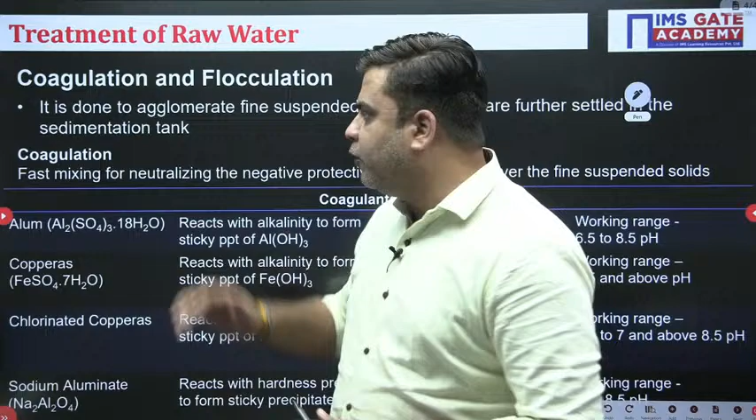So the first process is coagulation and flocculation. Coagulation is the fast mixing where the coagulant is induced, which neutralizes the negative protective charge present over the surface of the fine suspended solids so that they can come together. And flocculation is a process where the sticky precipitates revolve around the entire volume of the tank and over the surface of the sticky precipitate, all these fine suspended solids will attach to form a larger size of solid which can settle out easily.

So here are some of the things. Coagulation is fast mixing whereas flocculation is slow mixing. In order to carry out coagulation, we add some coagulants, namely alum, copperas, chlorinated copperas and sodium aluminate.

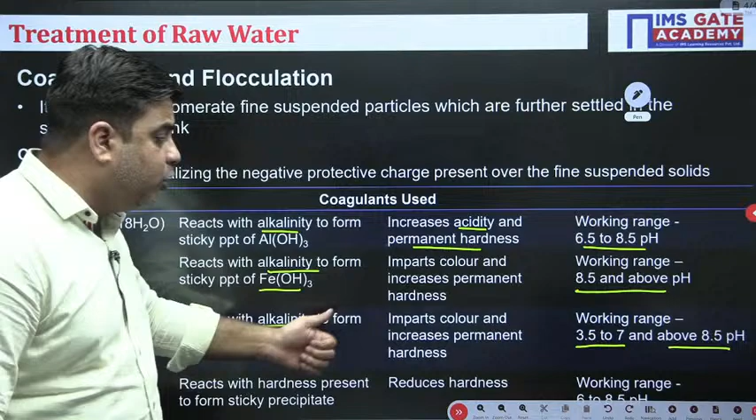My dear, here you can see there is a salt of aluminium and these two are salts of iron. Salt of aluminium will form light flocks, while salt of iron will form more dense or heavier flocks.

Heavy flocks are easier to settle compared to aluminium flocks, but since these copperas provide color to the water, copperas salts are used for the treatment of sewage, whereas aluminium salt, that is alum, is used for the treatment of raw water.

The last one is called sodium aluminate. The important thing about sodium aluminate as a coagulant is it reacts with the hardness present in water, while the above three listed coagulants react with alkalinity. Sodium aluminate reduces the hardness, but due to its high cost, it is very costly.

It is not used for treating community water. In fact, it is used for treating boiler feed water or industrial water. So this is the table regarding coagulants.

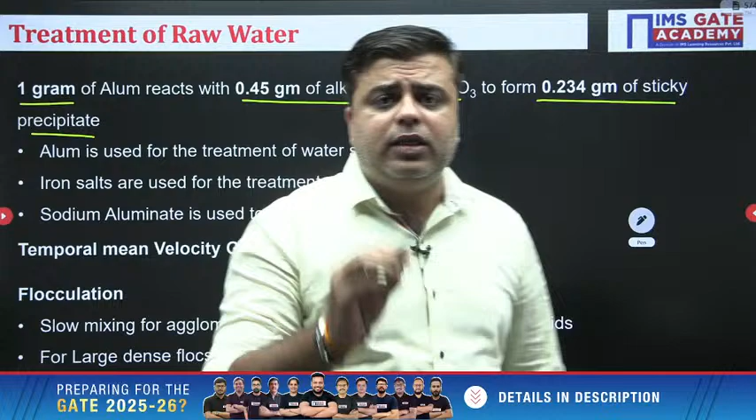Moving ahead, one very important fact you need to remember: 1 gram of alum will react with 0.45 gram of alkalinity as CaCO3 to form 0.234 gram of sticky precipitate. This is a very important fact that can help you solve the question directly without confusion. Alum is used for the treatment of water supplies.

Iron salts are used for the treatment of sewage. If I am talking about iron salts, I am talking about copperas and chlorinated copperas. These are iron salts.

And your sodium aluminate is used for the treatment of boiler feed water.

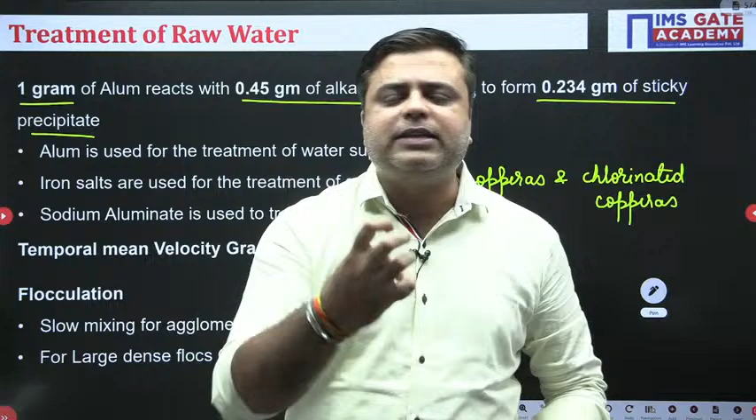I already told you that whatever sticky precipitate is formed in the coagulation process, this sticky precipitate is revolved in the entire volume of the flocculation tank so that the fine suspended solids can get adsorbed over the surface of this sticky precipitate to form larger size suspended solids.

And it can get settled out easily in the following sedimentation process. Moving ahead with this, this is a very fantastic question.

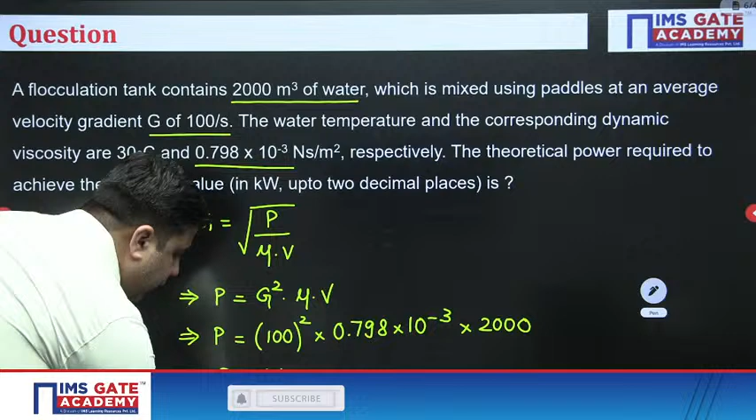1.596 into 10 raised to power 4. Just check this answer. So this is 100 into 100 into 0.798 into 2, so this is 1596. So power equals 15960 watts. You have to report the answer in which units?

You have to report the answer in kilowatts. So what will be the answer? Answer will be 15.96 kilowatts. So the power required is 15.96 kilowatts. This will be the power required, 15.96 kilowatts.

Let's move ahead with this. Try this next question. The next question is again a very simple question. Please try this, which will help you to revise this concept quickly. Again, just 1 minute of time for you. Go for it. Please go for it.

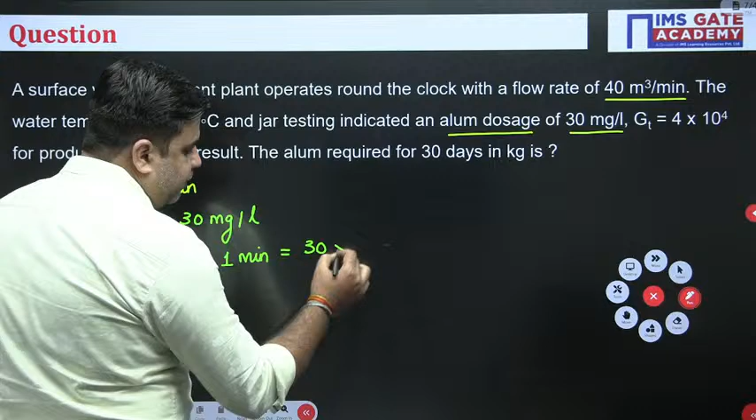30 milligram per liter. So first of all, you can calculate alum required in 1 minute. Alum required in 1 minute is 30 milligram multiplied by this much amount of water. So this is given to you in meter cube, so convert this into liters. So this will be 40 into 10 raised power 3 liters. So this much amount of alum is required in 1 minute, and this answer is in milligram.

Now you have to calculate alum required in 30 days. So just count the number of minutes in 30 days and multiply with this value to get the value of alum required for 30 days. Please do the calculation and tell me the answer.

Alum required in 30 days is equal to alum required in 1 minute, that is 30 into 40 into 1000, multiplied by number of minutes. So my dear, one day has how many minutes? So 1 hour has 60 minutes, 60 into 24 into 30 - these are the number of minutes which are there in 30 days.

Now this answer will come in milligram. You want the answer in kgs, so you need to divide this by 10 raised power 6. Divide this by 10 raised power 6, so you will get the answer in kgs. Please tell me the answer in kgs quickly. This will be the amount of alum required in kgs. Please do the calculation and tell me the answer in kgs.

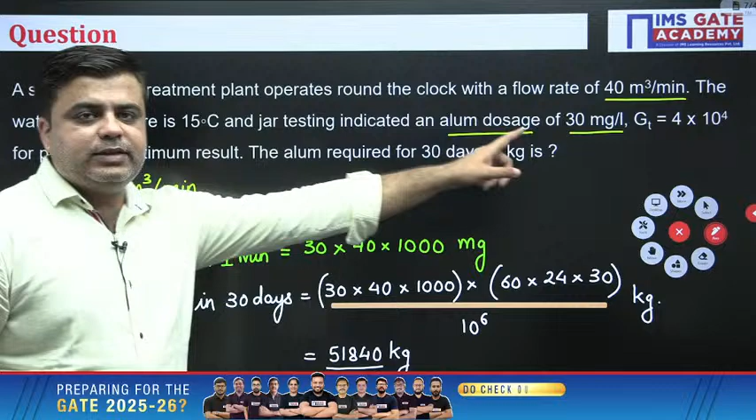Please tell me this answer. So this will be, I think, 51840 kgs. So this much amount of alum will be required in 30 days if alum dose is 30 milligram per liter. Very good, Piyush, 51840 kgs. Very good, moving ahead with this.

So after this, the next process is termed as filtration. My dear, filtration is a process of removing fine suspended solids from the water. Filtration is carried out by the units termed as filters. Filters are of two types, gravity filters and pressure filters. If the amount of head required by the water to flow through the filter medium is provided by the standing height of water column above the filter medium, then it is called as gravity filter.

If the amount of head required by the water to flow through the filter medium is applied artificially by applying the pressure, then it is termed as pressure filter. Which filter is used to treat community water? So gravity filters are used to treat community water, because if you start using pressure filters, then a huge amount of cost will be involved in creating the pressure for treating community water.

Now sir, gravity filters are again of two types, slow sand filter and rapid sand filter. Always keep this one thing in mind: whenever you are comparing these two filters, compare by the size of filter medium. In slow sand filter, the size of the filter medium particle is less as compared to rapid sand filter.

This answers one very simple question: which filter has more efficiency? Since size of the filter medium particle is less for slow sand filter, therefore efficiency of filtration is more for slow sand filter as compared to rapid sand filter.

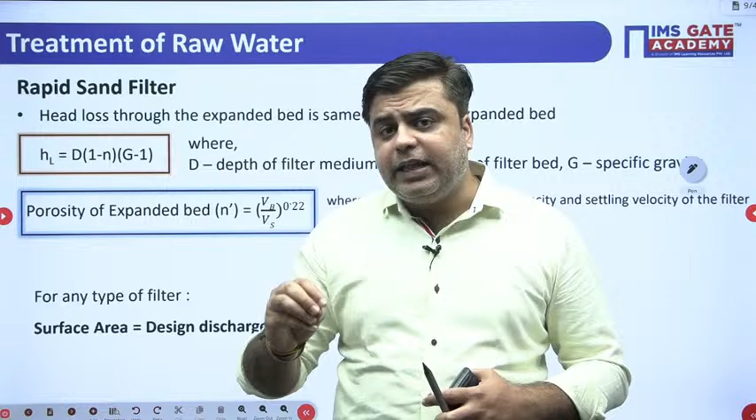Now there are other things related to rapid sand filter. First, when you do the backwashing, the filter bed will expand, and the porosity of the filter bed will increase. So porosity of the expanded filter bed is equal to VB by Vs raised to the power 0.22, where VB is the backwash velocity and Vs is the settling velocity of the filter medium particle.

Second thing, when the water flows through the filter medium, it will experience head loss, calculated by the expression HL equals D into 1 minus N into G minus 1, where D is the depth of the filter medium, N is the porosity of the filter medium, and G is the specific gravity of the filter medium particles.

There is one very important thing that you should remember: the head loss of water while flowing under normal operation and during backwashing is same. Meaning, when water flows through the filter medium during normal operation, the amount of head loss that occurs, the same amount of head loss will occur during backwashing. So the head loss occurring through the filter medium is same whether the bed is expanded or not.

So I will write down: head loss through expanded bed. When will the bed expand? During backwashing. Head loss through expanded bed is equal to head loss through unexpanded bed. Please remember this, because this will help you do a very good quality question from this area.

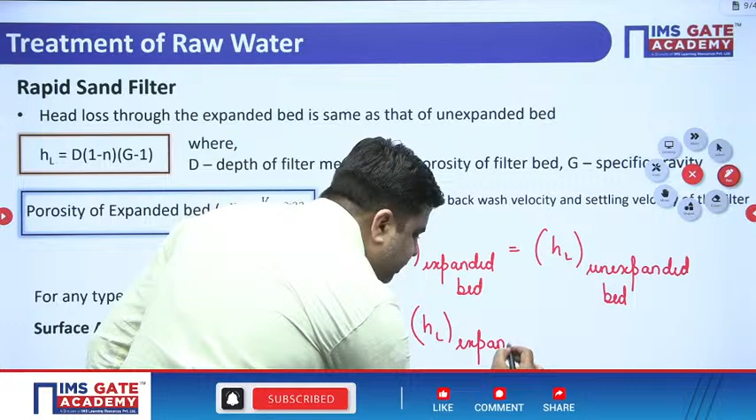Now sir, what is head loss through expanded bed? Head loss through expanded bed is equal to D dash, where D dash is the expanded depth of the filter bed, into 1 minus N dash, where N dash is the porosity of the expanded bed, into G minus 1. This is the head loss through the expanded bed, and you have to simply equate these two and calculate if any value is asked.

Now let's see some question. Please try this question, have 2 minutes of time. Go for it. But this time I want an answer from all of you: Piyush, Harish, Kirtan, Chandan, all of you. Keep answering.

Go for it. Keep answering the question.

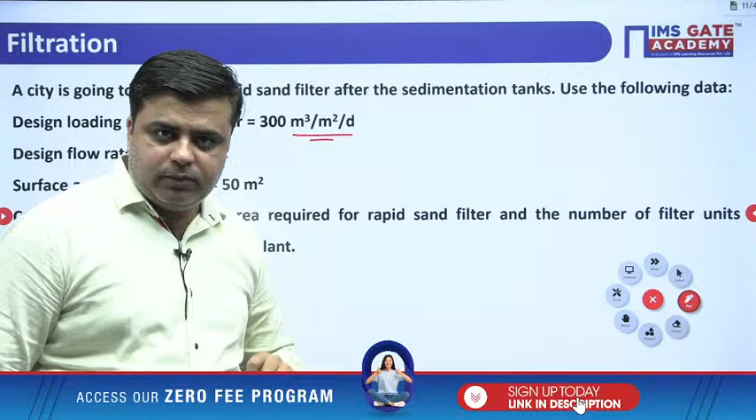From the units, what I can understand is 300 meter cube per day of water can be treated by 1 meter square area of filter bed. That is what this unit is telling me. 300 meter cube per meter square per day means I can treat 300 meter cube per day of water using 1 meter square of area. Very good, Kirtan, very good.

Very good. So design loading rate is given to you as 300 meter cube per meter square per day. And how much amount of water do you need to treat? You need to treat 0.6 meter cube per second. So first of all, calculate the total area of the filter bed required.

So total area of filter bed required is, area of filter bed required is design discharge divided by the rate of filtration. Rate of filtration simply means how much amount of water you can filter using 1 meter square of filter area.

So design discharge is given to you as 0.6 meter cube per second. Convert this into meter cube per day. So this is 0.6 multiply by 60 into 60 into 24. This will be your discharge in meter cube per day.

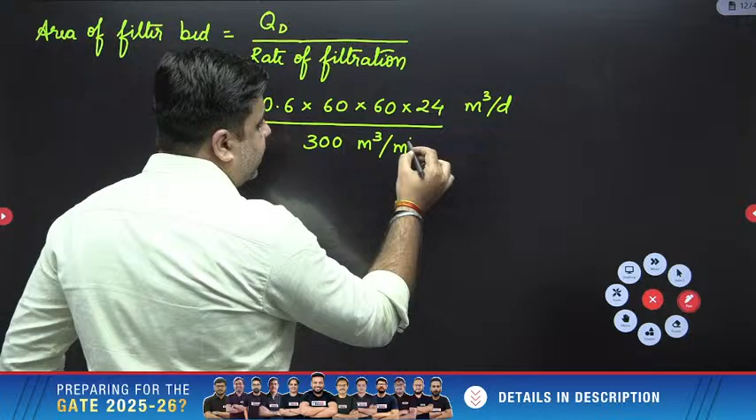And rate of filtration, this is your discharge in meter cube per day, and rate of filtration is already given to you in meter cube per meter square per day. So this is 300 meter cube per meter square per day. So this meter square will go up, meter cube per day will cancel out, and you will get the answer in meter square. Please tell me this answer of filter area.

Please tell me this answer. So this will be 0.6 into 60 into 60 into 24 divided by 300. So this will be 172.8 meter square. Now sir, area of one filter bed is 50 meter square.

Area of one filter bed is 50 meter square, so you can calculate number of filter beds. Number of filter beds equals total area of filter bed, that is 172.8, divided by area of one filter bed, which is 50 meter square. So just do 172.8 divided by 50. That will come out as

3.456, meaning you need to provide approximately 4 beds. You need to provide approximately 4 filter beds. So Piyush and Kirtan have answered it absolutely correctly. Absolutely, 4 beds are required.

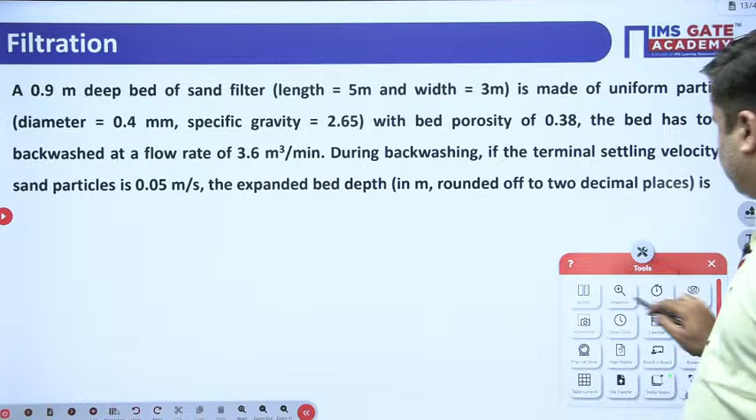Chalo, moving ahead with the next question. This is the next question. Please go for it. Again, a very, very important variety of question that can be framed from this segment. Please go for it, 3 minutes of time for you. This question should not require 3 minutes, but still I am giving you. Go for it, go for it.

Sir, should we include one standby as well? Not required, Piyush, as of now not required. So you have to just provide 4 filter beds, 4 filters you require. Meaning they are asking how many operational filters you require, right? So operationally 4 filters are required and 1 will be standby.

Go for it. Again, a very important variety of question. Please go for it. And all of you keep commenting your answers. It is required. Keep answering, keep answering.

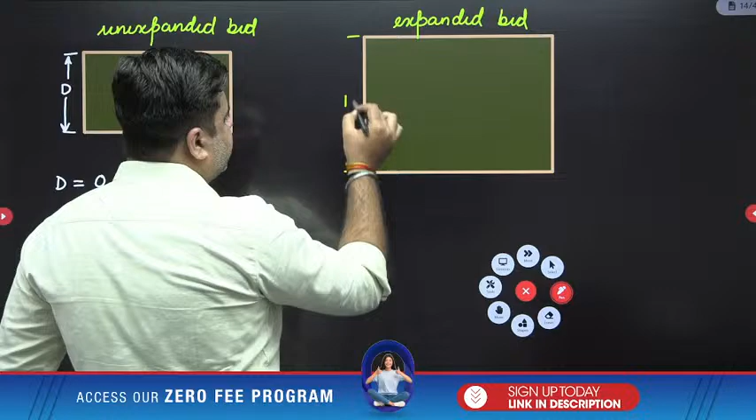This is the unexpanded bed. When this bed undergoes backwashing, the depth of the bed will increase. So this is the expanded bed. During backwashing, the depth of the filter will increase, and so will the porosity. So the depth of the filter bed during backwashing is D dash, and this D dash is what they are asking. Do you know the porosity here, N dash? You don't know the porosity, but data is given to you. You know the backwash velocity, and you also know the settling velocity of the medium particles.

Let's check this out. The backwash flow rate is given to you as 3.6 meter cube per minute.

Now using this backwash flow rate, you can calculate the backwash velocity. Backwash velocity is nothing but backwash flow rate divided by the plan area of this filter medium. For plan area, again the data is given to you: length is 5 meter and width is 3 meter. So you can calculate the backwash velocity. Backwash velocity equals backwash flow rate, 3.6 meter cube per minute. Units are very important, don't play with them, always write them down. Plan area will be 5 into 3.

That is your plan area, 5 into 3, and this will come out in meter per minute. Please do the calculation and tell me the backwash velocity. This will be 3.6 divided by 15, which is 0.24. So VB equals 0.24 meter per minute, because plan area in meter square cancels out and you get backwash velocity in meter per minute.

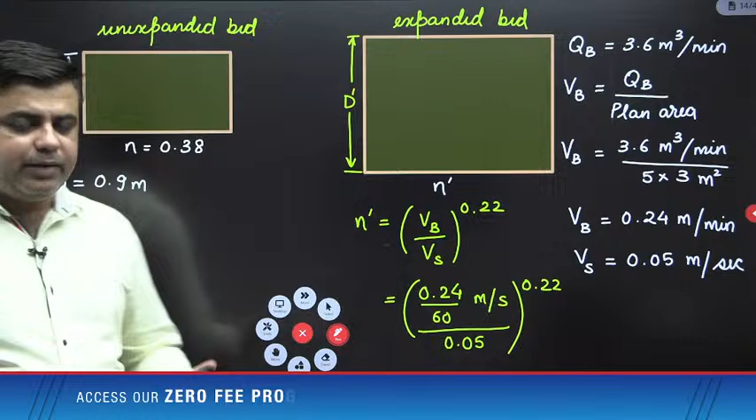Get me the value of porosity of the expanded bed. What will be the porosity of the expanded bed? Calculate this and tell me. So this will be 0.24 divided by 60, divided by 0.05, raised to the power 0.22. Just get me the value of porosity of the expanded bed. All of you quickly answer this.

Porosity of the expanded bed is 0.5736. So porosity of expanded bed, N dash, is 0.5736.

Now, how to calculate D dash? For this, we know that head loss through the expanded bed equals head loss through the unexpanded bed. So head loss through expanded bed equals head loss through unexpanded bed. Head loss through expanded bed is D dash into 1 minus N dash, into G minus 1.

And head loss through unexpanded bed is D into 1 minus N, into G minus 1. You already know the value of G, N dash, and N. First, G minus 1 and G minus 1 cancel out because the filter medium particle is not changing, so specific gravity stays the same. D dash you need to find. So I'll write D dash into 1 minus 0.5736 equals D, which is 0.9, into 1 minus porosity of unexpanded bed, which is 0.38.

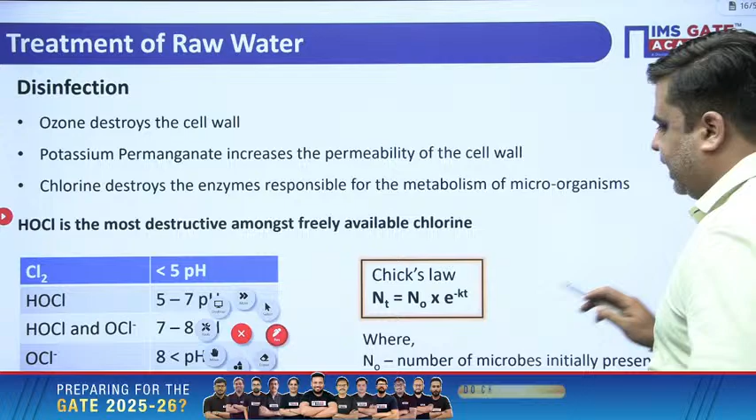But these two processes, especially ozone, give a pleasant taste to water, but ozone is very difficult to handle, and second, it is highly reactive. So ozone does not take care of future recontamination, because of its high reactivity. But ozone imparts a pleasant, good taste to water.

Potassium permanganate is basically used to treat well water in villages. It is not used at mass scale because the detention time required for killing microorganisms using potassium permanganate is usually 24 hours, which requires a lot of time. So majorly we go with treatment using chlorine.

Chlorination is the major process of disinfection for community water. Chlorine can be added in any form, solid, liquid or gas, it's available in all three forms. What does chlorine do? Chlorine actually destroys the enzymes which are responsible for the metabolism of microorganisms, leading to their killing.

The moment you add chlorine in water, it reacts with water to form hypochlorous acid, and this hypochlorous acid dissociates into hypochlorite ion. So when you add chlorine in water, it will be available in three forms: free chlorine Cl2, hypochlorous acid HOCl, and hypochlorite ion OCl minus. All these three forms are termed free forms of chlorine, and all are capable of carrying out disinfection. Out of these, hypochlorous acid HOCl has the highest tendency and capacity to carry out disinfection.

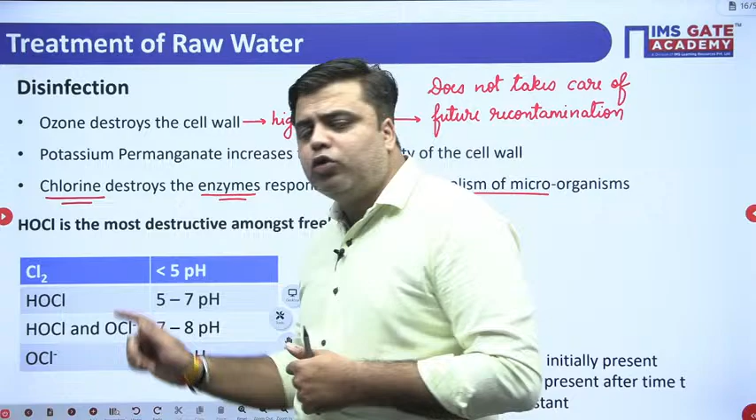If pH of the water is between 5 to 7, then hypochlorous acid will be predominating in the water sample. If pH of the water is between 7 to 8, then hypochlorous acid and hypochlorite ion, HOCl and OCl minus, will be predominating in water. And if pH of the water is greater than 8, then hypochlorite ion will be predominating.

Now I already told you that out of these three freely available forms of chlorine, HOCl is the most destructive disinfectant. Hence, for carrying out the disinfection, we maintain the pH of water in the range of 5 to 7.

Apart from this, chlorine also reacts with the ammonia present in the water to form chloramines: monochloramine, dichloramine and nitrogen trichloride. So you have monochloramine, NH2Cl, then dichloramine, NHCl2, and then nitrogen trichloride, NCl3. These three are termed as combined forms of chlorine.

So in total, when you are adding chlorine to water, there will be 6 different forms of chlorine available: 3 as freely available chlorine and 3 as combined forms of chlorine. Out of these 6 different forms, HOCl is the most destructive disinfectant. Second, freely available chlorines are more destructive disinfectants than these combined forms of chlorine.

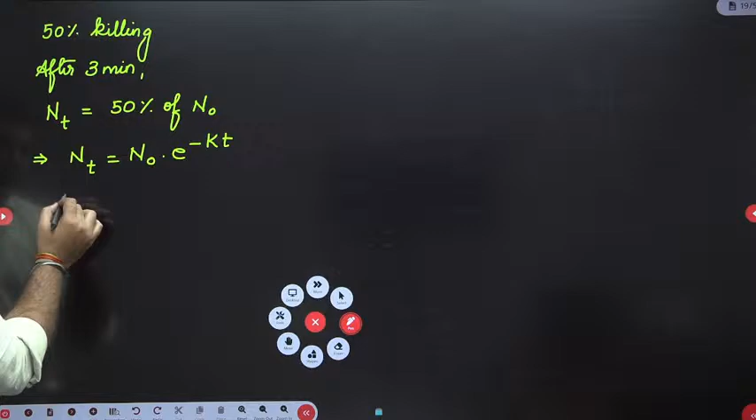50% of N naught is nothing but N naught by 2. This is equal to N naught into e raised to power minus k into 3 minutes, right? Now if the student is not our student, he will first calculate the value of k, and then he will find out the value of t.

But since the student is my student, what will my student do? My student will first frame another equation for 90% killing. So 90% killing is after time t, the number of microorganisms present is 90% of N naught. Okay sir, Nt is equal to 90% of N naught.

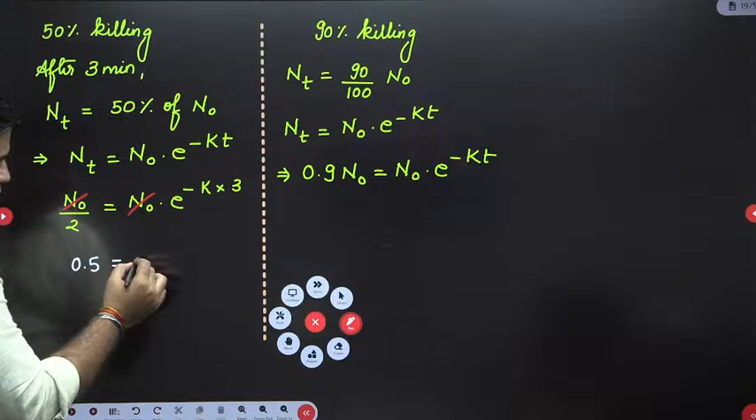So I will again use this. Nt is equal to N naught into e raised to power minus k into t. This time we don't know t, and the disinfection constant we also don't know. So Nt is equal to 0.9 times N naught, equal to N naught into e raised to power minus k into t. Quickly cut out N naught from either side. So what are you left with? You are left with 0.5 is equal to e raised to power minus k into 3. And here when you cut out N naught from either side, you are left with 0.9 is equal to e raised to power minus k into t.

Now what I will do is simply take the log on either side to the base e. So natural log of 0.5 is equal to minus 3k. Similarly, natural log of 0.9 is equal to minus k into t. Sir, simply divide equation 1 with equation 2 and you will get the answer for t. Please do it.

Always find out the easiest way of doing the calculation. Never go with the complicated way, right? Specifically when you have these type of comparative questions asked, simply divide these two equations and get the value of t.

So you have natural log of 0.9 by natural log of 0.5 is equal to minus k into t divided by minus 3k. So k and k will cancel out. Without calculating k, you will get the value of t. Please tell me the value of t. The minus and minus sign will also cancel out. So t is equal to 3 times natural log of 0.9 divided by natural log of 0.5.

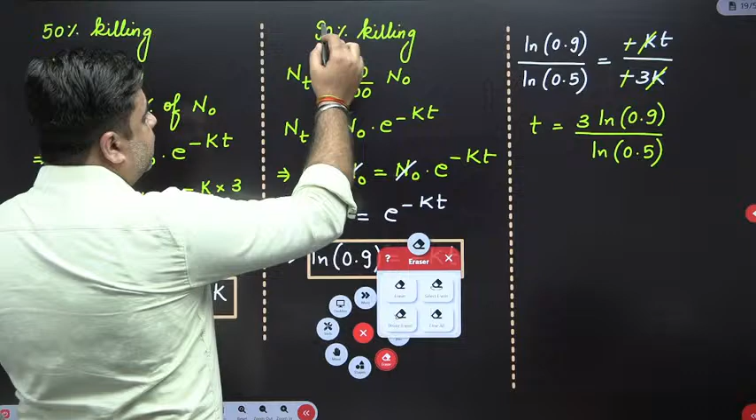Nothing will change, only one data point is changing here. So 99% killing efficiency, so this will be 99. One more thing: 99% killing efficiency means the number of microorganisms left here will be 1%. So this will be 1 by 100, so this will be 0.01. This will also be 0.01, this will also be 0.01, and this will also be 0.01.

Number of microorganisms left, this is number of microorganisms left. Sorry, I made a mistake. 99% means only 1% will be present in the system. Yes, absolutely correct. In flow, in too much excitement, I make these kind of mistakes. So please avoid this and just do this calculation.

So the number of microorganisms left here is 1% of N naught, right? Similarly, if 50% is killing, the number of microorganisms left in the system is 50% of N naught. Please do this calculation. So this will be 3 into natural log of 0.01 divided by natural log of 0.5.

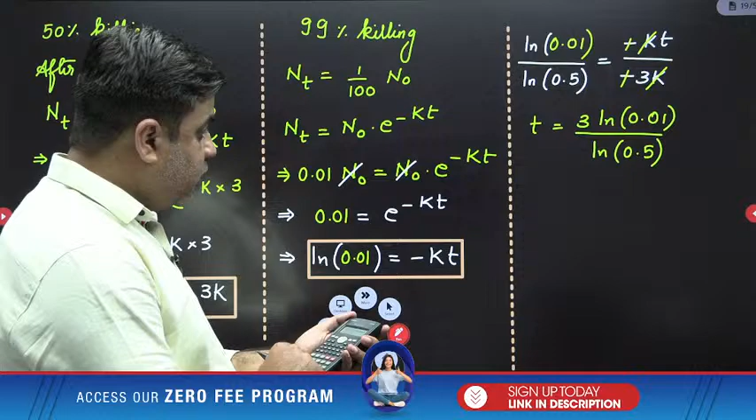So this is how much? So this is 19.93 minutes. Yeah, this is 19.93 minutes, the correct answer. Very good, 19.93 minutes is the correct answer.

Okay, chalo, moving ahead with this, try this question. A very, very good quality question, please try this. You will find this question not just in GATE examination but in so many exams. Go for it, 2 minutes of time for you.

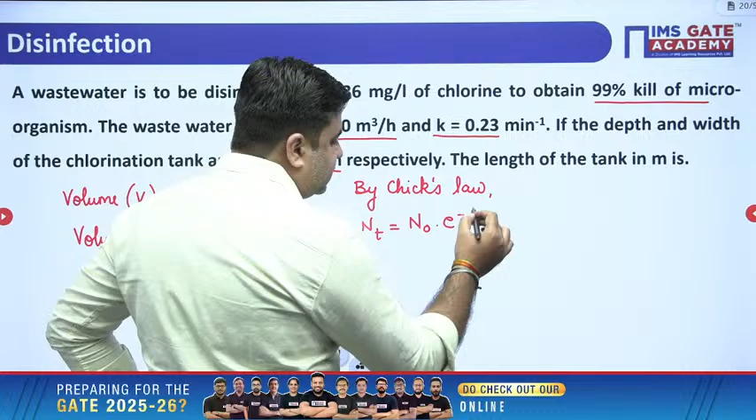If 99% killing has happened, then the number of microorganisms left in the system, NT, will be 1% of N naught. So 1 by 100 of N naught will be left in the system after time t, equal to N naught into e raised to power minus k, where k is given as 0.23 per minute.

So when you calculate, this time will also come out in minutes. The N naught and N naught will cancel out. Get the value of this time. This will be the detention time for which water will stay in the disinfection unit, because we want water to stay for this much time so that 99% killing can be taken care of by this chlorine. Please calculate this time.

This will be natural log of 0.01 divided by 0.23. So this will be 20 minutes. Just confirm this, 20.02 minutes. Yeah, so this T is coming out as 20.02 minutes, and this T is the detention time for which water will stay in the treatment unit.

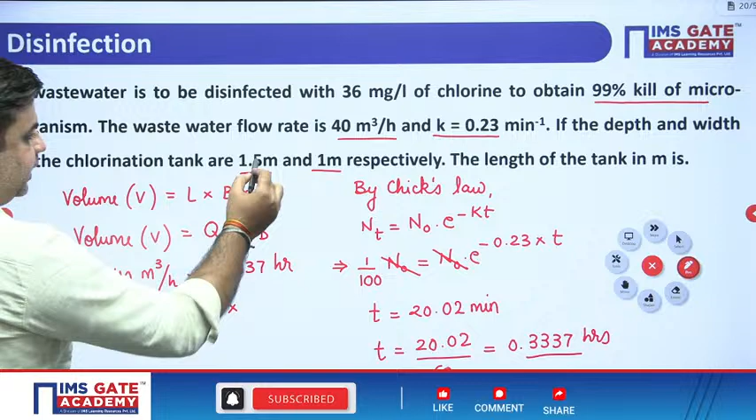So 1 into 1.5, and from here you can calculate the length of the tank. Please calculate this. So 13.35 divided by 1.5, this will be 8.9 meters. This will be my final answer for the length of the tank, which is 8.9 meters. All of you getting the same answer? This is 8.9 meters, right?

Okay, let's move ahead with the next question. Try this, a very good quality question. This is, I think, also a GATE previous year question. Please try this. 3 minutes of time for you. Go for it.

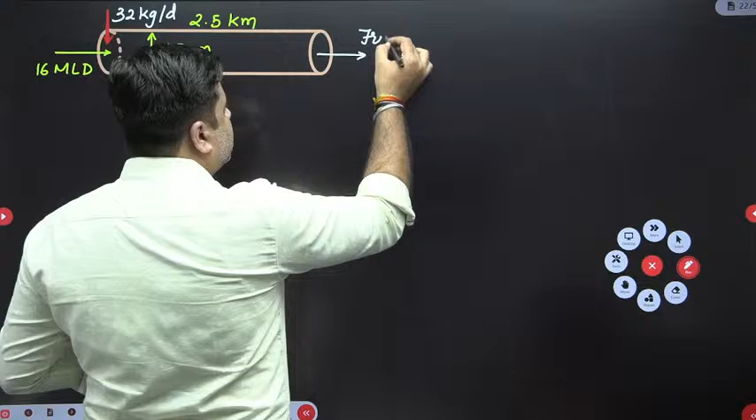Okay, you are applying chlorine here. What is the chlorine dose that is applied? 32 kg per day. So here you are applying 32 kg per day of chlorine. And when the water comes out from the exit, it is free from these microorganisms, it is totally disinfected. So this is free from microorganisms or free from pathogens.

Now the question says that for the same pipe, same diameter, same length, if the discharge is increased from 16 mld to 22 mld, in order to carry out complete disinfection of water, how much amount of chlorine do you need to add? So now the discharge flowing in the pipe will be 22 mld.

Area is same, meaning diameter of the pipe is still 45 centimeters. Length of the pipe is same, 2.5 kilometers. Now you need to find out how much chlorine you need to apply so that complete disinfection is carried out. Now tell me one thing, why will the chlorine dose change? What is the reason for change in chlorine dose?

Initially when the discharge was less, the time available for water to flow to the other end was more. But now since discharge is more, velocity will also be more because area is constant. So the time available for water and chlorine to carry out disinfection will be less. So in the second case, velocity V2 will be more than velocity V1.

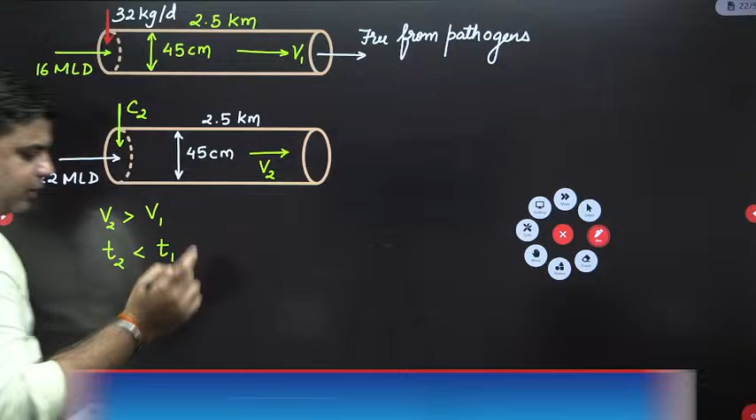If velocity is more, the time available to carry out disinfection in the second case will be less than the time available in the first case. So when time available is less, obviously you need to apply more amount of chlorine.

Now sir, which law gives the relation between time of disinfection and concentration of disinfectant? It is given by Watson's law. So by Watson's law I can write down: T into C raised to power n is a constant. Meaning T1 C1 raised to power n is equal to T2 C2 raised to power n.

Now why am I not using N1 and N2 here? The reason is the type of microorganism is the same, not different, that is why N and N are same. In the question, the value of N is also given as 1. So I will simply write T1 C1 raised to power 1 is equal to T2 C2 raised to power 1. Okay, now one by one.

How should I calculate T1? This T1 is nothing but length divided by V1. How to calculate V1? V1 is nothing but discharge flowing through the pipe divided by area of the pipe. Okay, that's V1, let's do this.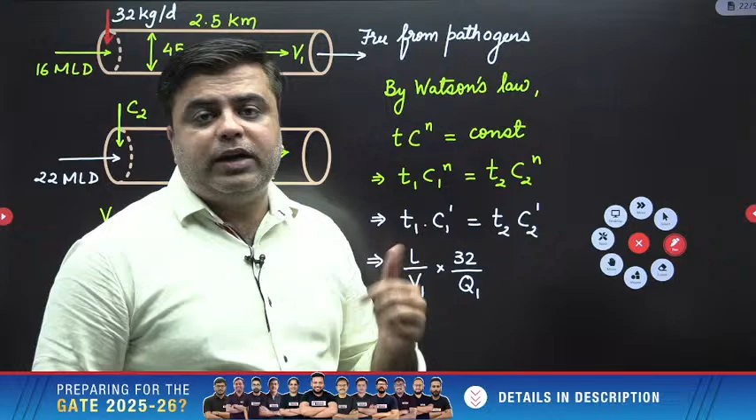So T1 equals L upon V1, and this C1 is the weight of chlorine applied per day, that is 32 kg per day, divided by the discharge Q1. 32 kg per day is not the concentration by itself - concentration is always weight per unit volume, that volume can be in meter cube or in liters. So this is the concentration, weight of chlorine applied per unit volume. So 32 by Q1 will be the concentration of chlorine applied in the first case.

Similarly, let's do the second case. T2 equals length divided by V2, into concentration equals weight of chlorine applied in the second case divided by the discharge Q2.

Please do solve this further. So this is equal to L upon V1, which can be written as Q1 upon area of pipe, into 32 by Q1. Don't solve anything as of now, just keep adding the expression. Similarly, L upon V2 can be written as Q2 divided by area of pipe, into W2 by Q2.

Now see this, L and L will cancel out, A and A will cancel out. So what are you left with? You are left with 32 by Q1 square is equal to W2 by Q2 square. Calculate this.

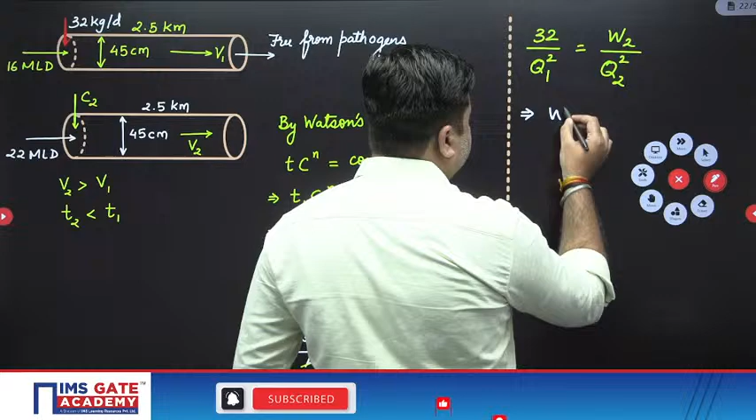So 32 by Q1 square is equal to W2 by Q2 square. Please do this calculation and tell me the answer. So W2 is equal to Q2 by Q1, the whole square, into 32. So W2 is equal to Q2 is 22, Q1 is 16, the whole square into 32. Please do this calculation.

Piyush is answering 40.89 kg per day. Okay, please solve this.

So this will be 22 by 16 square into 32. So this will be 60.5 kg per day. So W2 will be 60.5 kg per day.

Just all of you quickly confirm this. Yeah, this will be 60.5 kg per day, right? This will be your final weight of chlorine that you need to apply every day when your discharge has increased to 22 mld. Okay, it's a very good question, right?

You can expect this kind of question in your examination. So moving ahead with this, let's try the next thing. Okay, now my dear, this finishes the first part of environment, that is your raw water engineering, in which we have discussed specifically about quality of water and the treatment of water. Those two are very important areas from where you can expect a good quality question. Now next is your wastewater engineering.

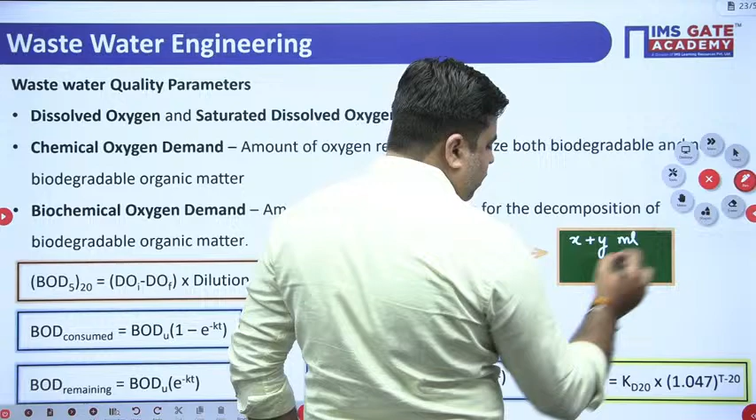So if you have to calculate the dilution ratio of this diluted sample, it is equal to total volume of the diluted sample divided by the volume of original sample, which is x, present in the diluted sample. So in this case, the dilution ratio will be x plus y divided by x. Total volume of the diluted sample divided by the volume of original sample present in the diluted sample.

Okay sir, now BOD consumed is equal to ultimate BOD into 1 minus e raised to power minus k into t. BOD consumed means the amount of BOD which is decomposed after time t. And BOD remaining simply means the amount of BOD which remains after time t. One more thing here, whenever I need to represent organic matter present in the wastewater, I represent it in terms of BOD. So BOD basically gives you an idea about how much amount of organic matter is present in the wastewater.

Similarly, BOD consumed is also equal to BOD ultimate into 1 minus 10 raised to power minus KD into T. So whenever you are using base 10, you have to use KD. If you are using base e, you have to use K. Similarly, BOD remaining after time T is equal to BOD ultimate into e raised to power minus K into T. Similarly, BOD remaining is equal to BOD ultimate into 10 raised to power minus KD into T.

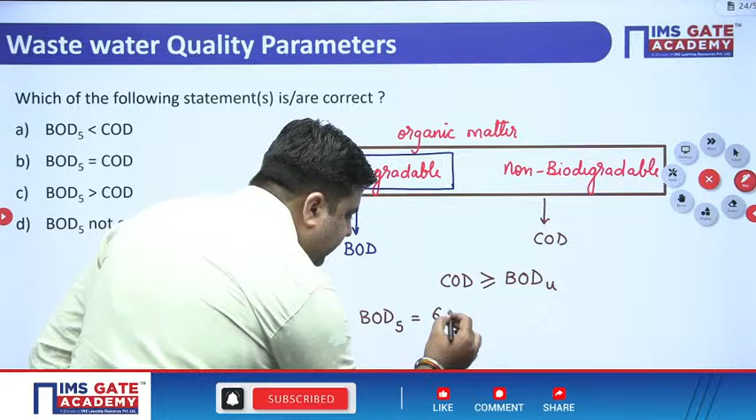Now which BOD am I talking about? I am talking about the total BOD of the wastewater, which is termed as BOD ultimate. So COD is greater than or equal to BOD ultimate. And we know that BOD5 is approximately 68% of BOD ultimate.

Approximately I am saying 68%, not in every case - for a particular value of K, BOD5 is 68% of BOD ultimate. So BOD5 has to always be less than BOD ultimate. This means COD will always be greater than BOD5, in every case. So option A is correct.

Coming to option B, BOD5 equals COD - absolutely incorrect. BOD ultimate can be equal to COD only when biodegradable organic matter alone is present. BOD5 is greater than COD - absolutely incorrect. BOD5 is not equal to COD - again absolutely correct, since BOD5 never equals COD, while BOD ultimate can equal COD if only biodegradable organic matter is present. So for this question, option A and option D are the correct answers.

Chalo, moving ahead with this. Okay, you can write this. These are very important findings which will actually help you out.

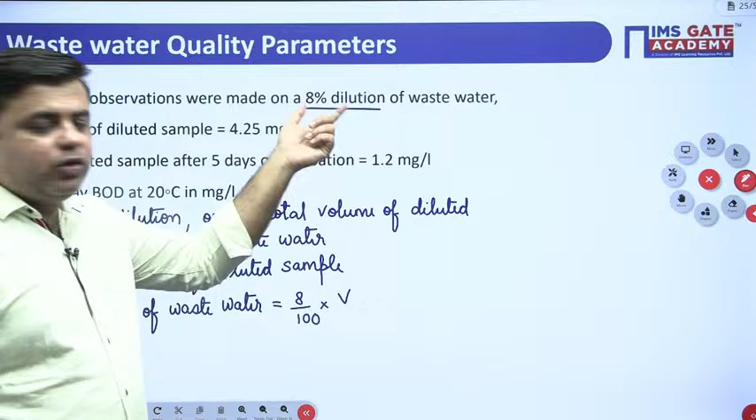Now this dilution is given to you for calculating the dilution ratio. Why am I saying this? The initial DO of the diluted sample is 4.25 milligram per liter. DO of the diluted sample after 5 days of incubation is 1.2 milligram per liter. The 5-day BOD at 20 degrees Celsius is - now sir, how to calculate 5-day BOD? So BOD5 is equal to DO initial minus DO final, multiplied by dilution ratio or dilution factor.

So what is initial DO? Initial DO is given to you as 4.25 milligram per liter, and DO final is given to you as 1.2 milligram per liter. So this is 1.2 milligram per liter multiplied by dilution ratio. For the dilution ratio, the final volume of the diluted sample is V, divided by the volume of wastewater present in the diluted sample, which is 0.08 times V. So this will be the dilution ratio for 8% dilution of the sample. Please calculate this - this will give you BOD5.

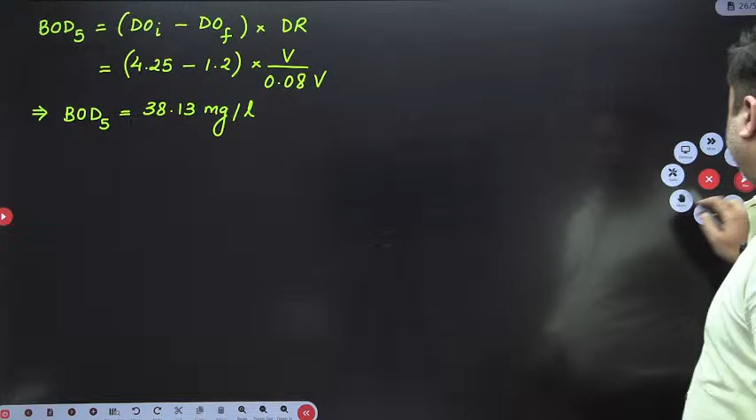So BOD 5 will be 4.25 minus 1.2 divided by 0.08. So this will be 38.13 milligram per liter. All of you just quickly confirm this, whether it is 38.13 milligram per liter or not. So BOD 5 is 38.13 milligram per liter.

Now try this question. The following observations are made on 12% dilution of the water sample. This time the dilution is given to you as 12%. The initial DO of the diluted sample is 6.23 milligram per liter, and DO of the diluted sample after 5 days of incubation is given as 0 milligram per liter. 0 milligram per liter means it's a warning. You don't have to calculate BOD 5 whenever final DO is equal to 0. So BOD is not calculated whenever final DO is reported as 0.

So you can answer this: BOD 5 is not calculated when DO final is 0, when DO final is 0 milligram per liter. Now sir, what is the possible reason for this?

When you do 5 days of incubation, the microorganisms utilize the dissolved oxygen to carry out the decomposition of organic matter. Now if dissolved oxygen final reported is 0, there can be chances that this dissolved oxygen has been utilized even before the duration of incubation, meaning it may not have lasted for 5 days - it may have been utilized after 2 or 3 days. So if more dissolved oxygen had been available, those microorganisms could have carried out more decomposition. So whenever final DO is reported as 0, first of all BOD 5 is never calculated. Second, for such a sample you have to increase the dilution and again perform the BOD 5 test. So for this case BOD 5 is not calculated.

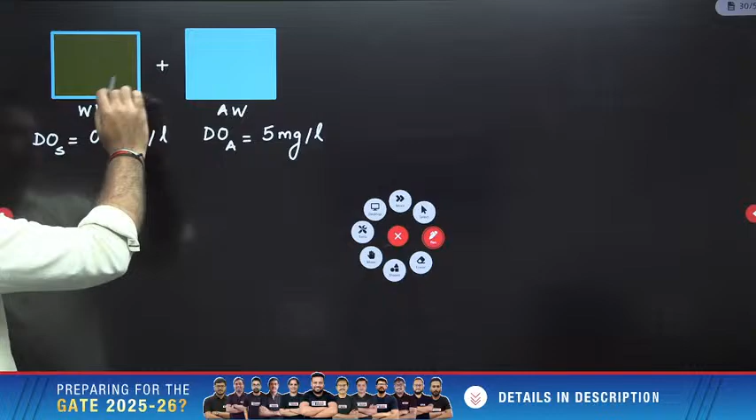Now what you need to do is, when you mix these two, you will get the diluted sample. So first you need to find out DO initial of this diluted sample. Now sir, how to do this? This is the diluted sample we have. Now the volume of diluted sample is not given to you, and in fact DO initial of this diluted sample is also not given to you. So if you cannot calculate BOD 5, you cannot use the expression for calculating BOD ultimate. Now sir, how to do this?

You can check this: DO of wastewater and DO of aerated water is given to you. By any means, if you can calculate the volume of these two things, you can take the weighted average for calculating DO of this mix, DO of diluted sample. So first of all, if the total volume of the sample is V mL, then total volume of diluted sample is V mL. How much amount of wastewater is present in this? So 4% dilution means 4% of V is the amount of wastewater.

So volume of wastewater is 0.04 times of V. So what will be the volume of aerated water? Volume of aerated water is equal to 0.96 times of V, right? This is the volume of aerated water and this is the volume of wastewater.

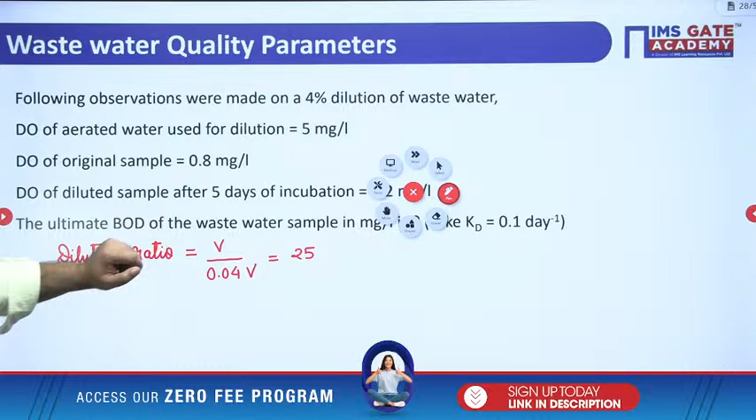Now DO final of the diluted sample is also given to you. DO final of the diluted sample is given to you as 1.2 milligram per liter. So DO final is 1.2 milligram per liter.

So from here you can calculate your BOD5. BOD5 is DO initial minus DO final, multiplied by dilution ratio. DO initial is 4.832. So this is 4.832 minus DO final, which is 1.2, into dilution ratio. Dilution ratio is, you have already calculated this, which is 25.

Please calculate this BOD5. So 4.832 minus 1.2 into 25. So this will be 90.8 milligram per liter. So BOD5 is 90.8 milligram per liter.

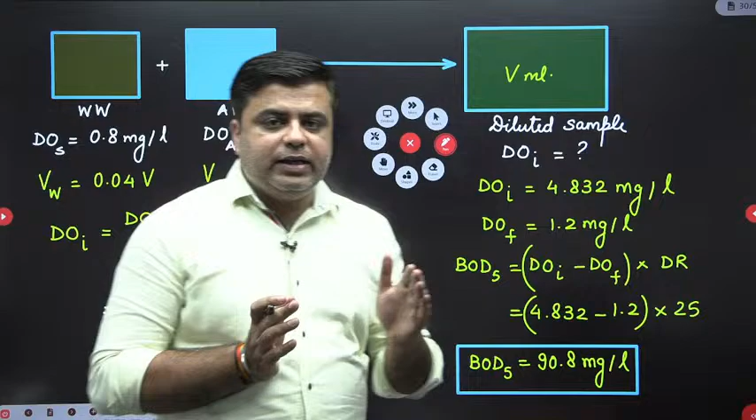Now once you know the value of BOD5, you can calculate the ultimate BOD by using the expression. First of all, my dear students, this BOD5 is BOD consumed. It means in the 5 days you can see the change in dissolved oxygen. This change in dissolved oxygen is happening because oxygen is getting utilized in decomposing the organic matter. So this BOD5 is basically BOD consumed in 5 days. So I will write down: BOD5 consumed is equal to BOD ultimate

into 1 minus 10 raised to power minus KD into T, KD into 5, right? The value of KD is already given to you. BOD5 consumed, you have already calculated, is 90.8. So this is 90.8 is equal to BOD ultimate, you need to find out, into 1 minus 10 raised to power minus KD, given to you as KD is 0.1 per day. Please do this: 0.1 per day into 5.

Please calculate this. So 10 raised to power minus 0.5, 1 minus answer, so 90.8. This will be 132.8 milligram per liter. So BOD ultimate is 132.8 milligram per liter.

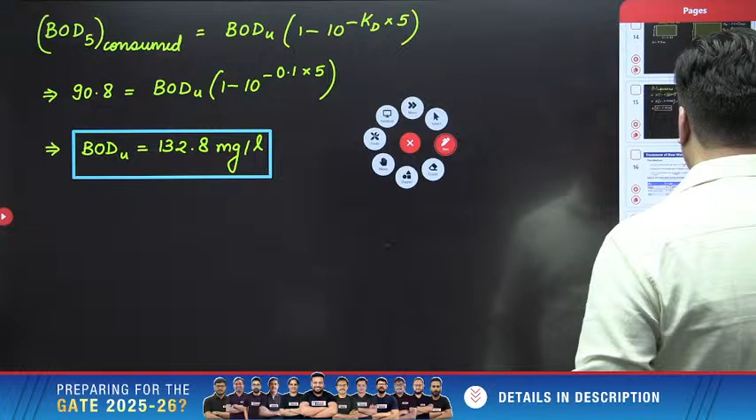All of you just quickly confirm this, whether you are getting the same answer or not. Please do this. Kindly confirm this once. Answer is fine. Okay, let's move ahead with the next question.

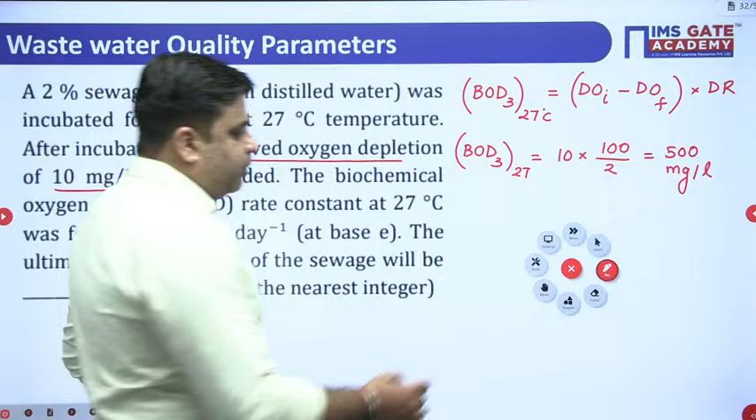Please keep a check: this BOD3 is BOD consumed in 3 days. Now, how do we use this expression?

For calculating ultimate BOD, I will use this expression: BOD3 consumed is equal to BOD ultimate into 1 minus e raised power minus K27 into 3. K27 is already given to you in the question as 0.23 per day. So BOD consumed, which you calculated as 500, is equal to BOD ultimate into 1 minus e raised power minus 0.23 into 3.

Please find out this BOD ultimate. Calculate e raised power minus 0.23 into 3. So this will be 1003 milligram per liter. Please confirm whether you are getting the same answer for BOD ultimate. So BOD ultimate is 1003 milligram per liter.

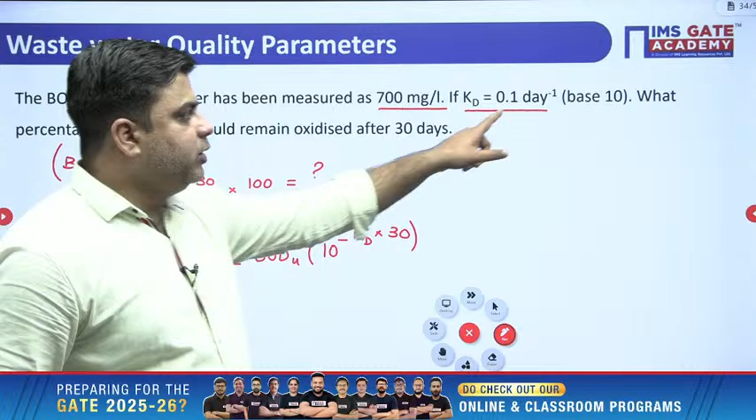Do I know the value of KD? Yes, it is 0.1 per day. So simply take BOD ultimate here: BOD remaining after 30 days by BOD ultimate is equal to 10 raised power minus 0.1 into 30. Please calculate this. So this will be 0.001. Now you can calculate the percentage from here.

So BOD30 remaining by BOD ultimate into 100 is equal to 0.001 into 100, which is equal to 0.1 percentage. So 0.1 percentage of BOD ultimate will be unoxidized even after 30 days. This is how you need to approach the question.

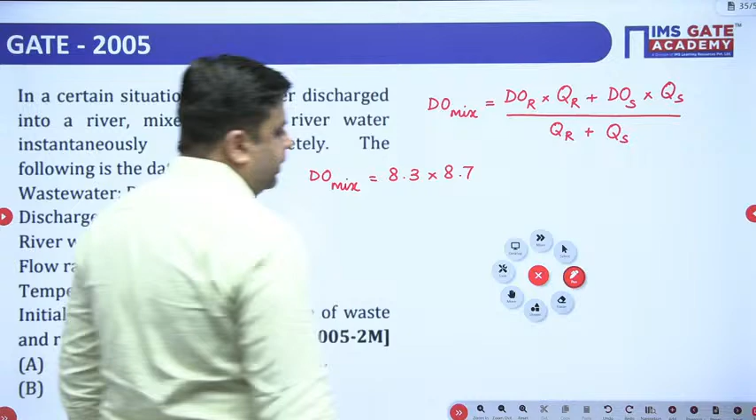Please do this. DO of mix is equal to DO of river, 8.3 milligram per liter, into discharge of river, 8.7 meter cube per second, plus DO of wastewater, 2 milligram per liter, into discharge of wastewater, 1.1 meter cube per second, divided by discharge of river plus discharge of sewage, which is 8.7 plus 1.1. So this becomes 8.3 into 8.7 plus 2 into 1.1, divided by 8.7 plus 1.1.

So the answer will be 7.593 milligram per liter. So DO of mix is 7.593 milligram per liter.

So DO of mix is 7.593 milligram per liter. This is how you need to solve this question. It was a GATE 2 marks question in 2005. Okay, let's move ahead with this.

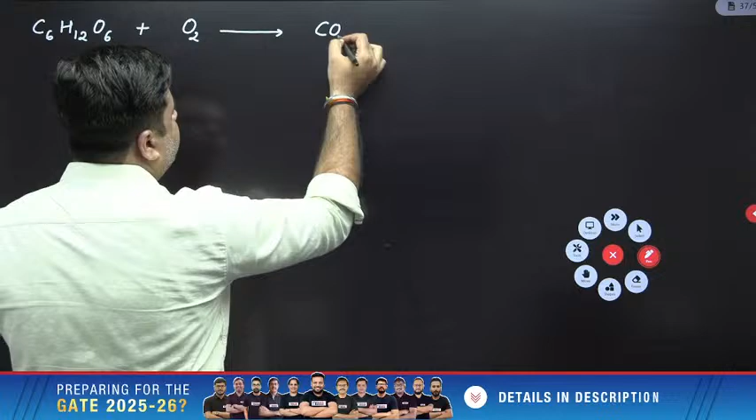Now sir, you have to first balance this equation. So for balancing, here it will be 6, here it will be 6, and here also it will be 6. So this is the balanced equation.

So what you need to do for calculating theoretical oxygen demand: the first thing is write down the oxidation equation of the chemical or organic matter given to you. Now you have to apply the mole concept. So what does mole concept say? You can see this is glucose.

So 1 mole of glucose will consume 6 moles of oxygen. So 1 mole of glucose requires 6 moles of oxygen. Now, check this out.

0.001 mole of glucose will require how much amount of oxygen? That you need to find out here. So 0.001 mole of glucose will require 0.006 moles of oxygen, and this much mole of glucose is present in 1 liter of water.

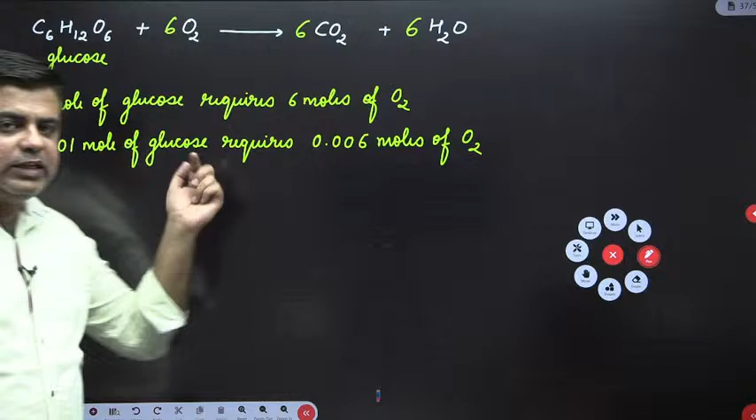So this much amount of oxygen will be required by 1 liter of water. This many moles of glucose will require this many moles of oxygen. Now you have to simply calculate the weight of this many moles of oxygen, and that will be your theoretical oxygen demand. So THOD equals number of moles of oxygen required, 0.006, multiplied by the molecular weight of oxygen, which is 16 into 2, and this will give you the answer in gram per liter.

Please calculate this. Kindly give me this theoretical oxygen demand. Please tell me the value of this theoretical oxygen demand.

So, 0.006 into 32. So this will be 0.192 gram per liter. Now convert this into milligram. So this will be 192 milligram per liter. This is the theoretical oxygen demand of this water sample.

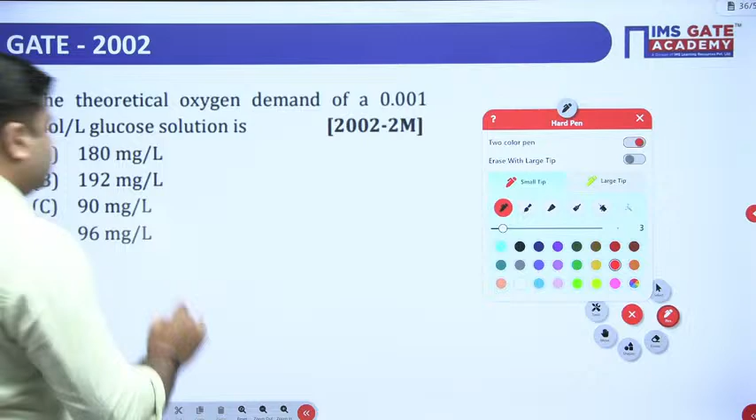Let's check this out. So your option B is the correct option. It was a GATE 2 marks question asked in the year 2002. So 192 milligram per liter was the theoretical oxygen demand, right? This is how you need to proceed. Let's move ahead.

Okay, please try this question. A wastewater stream having a discharge of 3 meter cube per second, ultimate BOD of 80 milligram per liter, is joining a small river having a flow of 11 meter cube per second and ultimate BOD of 4 milligram per liter. Both the streams get mixed instantaneously. Cross-sectional area of the river is 60 meter square. Assuming K is 0.25 per day to the base E, the BOD in milligram per liter of the river 25 kilometers downstream of the mixing point is.

A very interesting question. They are saying what is the BOD of the river in milligram per liter 25 kilometers downstream of the mixing point. Now usually students have many types of confusion: sir, which BOD is this?

My funda is, if nothing is mentioned, treat this as BOD consumed. Ideally, it has to be BOD remaining. But when you see the solutions given by these question papers over the years, in some years they have considered this as BOD remaining, in some years they have considered this as BOD consumed. My thing will be, if nothing is mentioned, consider it as BOD consumed, as simple as that. You can take that kind of risk.

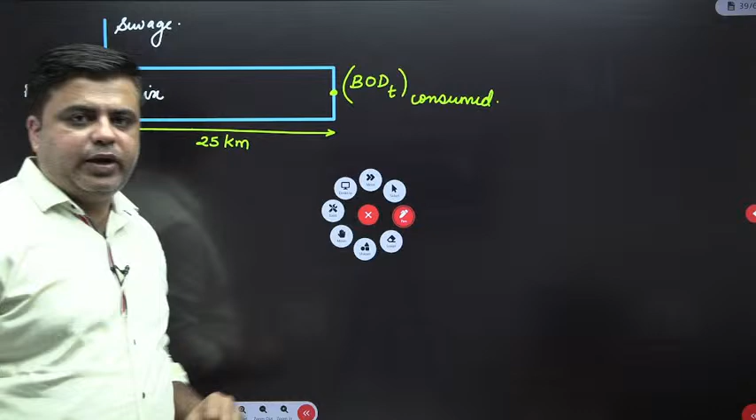What we need to do here is first find out BOD ultimate of the mix, then find out how much time the river will require to flow from this section to that section, a distance of 25 kilometers. So BOD ultimate of mix is equal to BOD ultimate of river multiplied by discharge of river, plus BOD ultimate of sewage multiplied by discharge of sewage, divided by discharge of river plus discharge of sewage. Please calculate this.

BOD ultimate of river is 4 milligram per liter and discharge is 11 meter cube per second. So 4 into 11, plus BOD ultimate of sewage is 80 and discharge is 3, so 3 into 80, divided by discharge of river 11 plus discharge of sewage. Please calculate BOD ultimate of mix. So 4 into 11 plus 3 into 80 divided by... this will be 20.29 milligram per liter. This is BOD ultimate of mix, right?

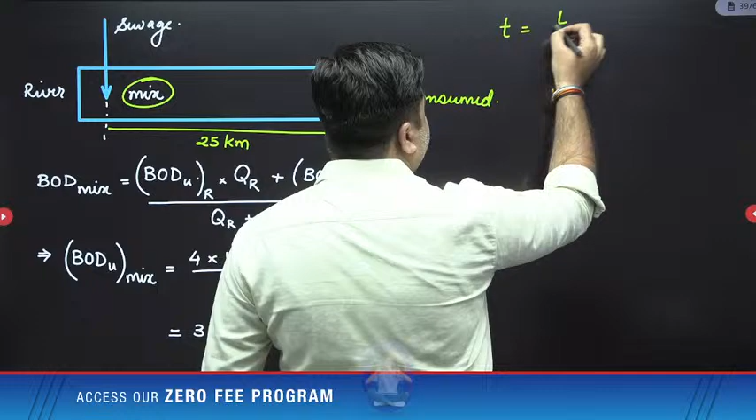Now calculate in how much time water will reach from this section to this section. Time required will be equal to length, which is 25 kilometers, divided by velocity. Do I know the value of velocity? No, but I know the total discharge of this mix and I'll know the cross-sectional area of flow.

So time required is equal to length divided by discharge by cross-sectional area. What is discharge of mix? Discharge of mix is equal to discharge of river plus discharge of sewage stream. Discharge of river is given as 11. Wait, these are not the discharges... discharge of the sewage is 3. So you have 4 into 11 plus 3 into 80 divided by 14. This will be 20.29 milligram per liter.

Now you can calculate discharge of mix. Discharge of mix equals discharge of river plus discharge of sewage, that is 14 meter cube per second. Cross sectional area is also given, cross sectional area of the river is 60 meter square. So you can calculate velocity of flow. Velocity equals discharge of mix by cross sectional area, that is 14 by 60, and this will come out in meter per second.

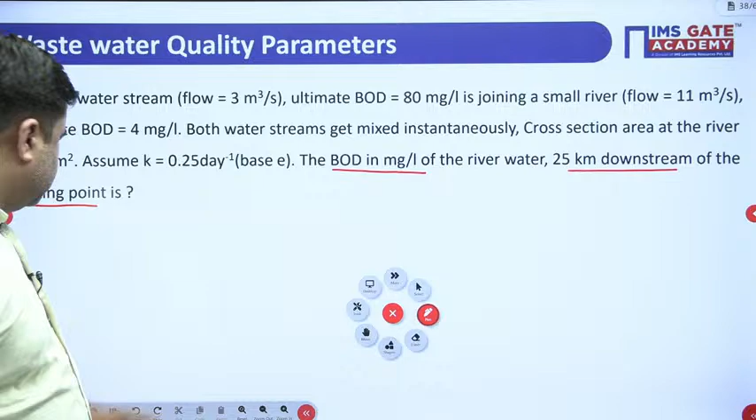Please calculate the time in days because the value of K is given in days. So time T is equal to length, which is 25 kilometer, so 25 into 1000, divided by velocity using area 60. So 14 by 60 into 3600 into 24, so now this velocity will be in meter per day and this length will be in meter, so time will come out in days. So 25 into 1000 into 60 divided by 14 into 3600 into 24. This will be 1.24 days.

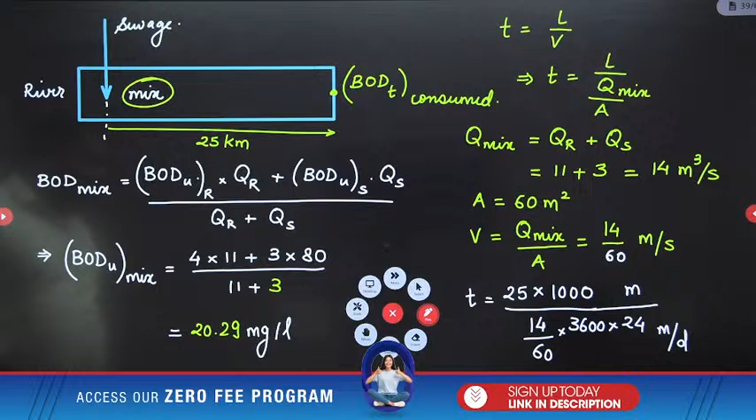Now once you know the value of time, you can calculate BOD consumed in time T. BOD in time T is equal to BOD ultimate into 1 minus e raised to the power minus K into t. Value of K is given as 0.25 per day. So BOD after time T is equal to BOD ultimate of the mix, which is 20.29, into 1 minus e raised to power minus 0.25 into time T, where time T is 1.24 days. Just calculate this.

So this will be 5.408. BOD after time T is 5.408 milligram per liter. Please note this down. So BOD after time T is 5.408 milligram per liter. Okay, let's move ahead with this.

After this, we have seen a lot of questions from BOD and we have also seen some questions from the disposal of sewage, right? Now, next is the design of sewers.

For design of sewers, sewers are designed to carry maximum discharge, but it is also ensured that corresponding to minimum discharge, the development of self-cleansing velocity should take place inside the sewer. This self-cleansing velocity does not allow the solids to settle when the sewage is flowing inside the sewer.

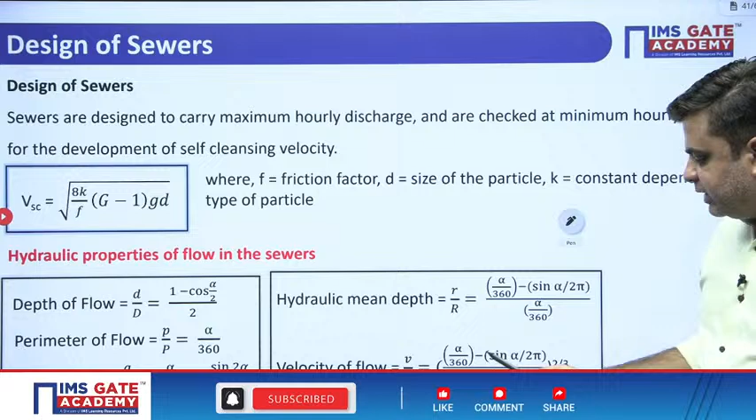The ratio of velocity of flow small v by capital V is equal to alpha by 360 minus sin alpha upon 2 pi, divided by alpha by 360, raised to the power 2 by 3. So these are some of the hydraulic properties of the sewer that you should remember.

Then for sewers having same degree of self-cleansing, it means the tractive stress applied by the sewer on the settled solids is same. That is what we mean by sewers with same degree of self-cleansing. For such sewers, the ratio of velocity of flow small v by capital V is equal to small r by capital R raised to the power 1 by 6.

Next, a question: a sewer of 400 mm diameter with slope 1 in 800, running half full, has a velocity of flow of 1.64 meter per second. Check this out.

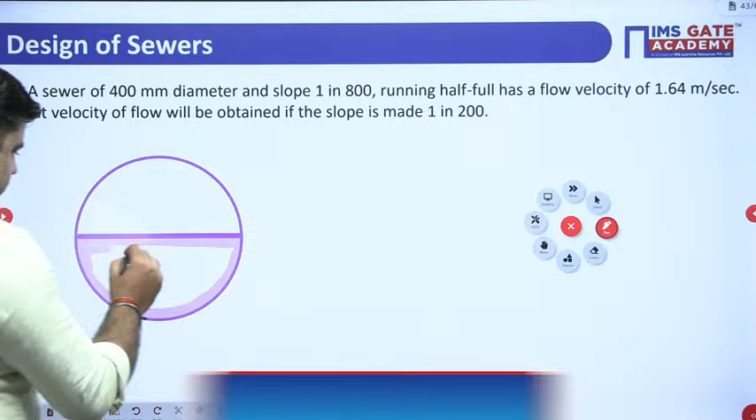So say this is the sewer, and this sewer is running half full. The sewer of 400 mm diameter, the size of the sewer is given to you as 400 mm. This is the depth of flow, small d. So depth of flow small d is equal to 400 by 2, that is equal to 200. Slope of the sewer S is given to you as 1 in 800.

Then it is running half full having a velocity of 1.64 meter per second. So small v is given as 1.64 meter per second. What velocity of flow will be obtained if the slope is made 1 in 200? So velocity V1 is 1.64 for the slope of 1 in 800. If the slope is increased to 1 in 200, then what will be the velocity of flow V2? This is asked. It's a simple question of Manning's equation.

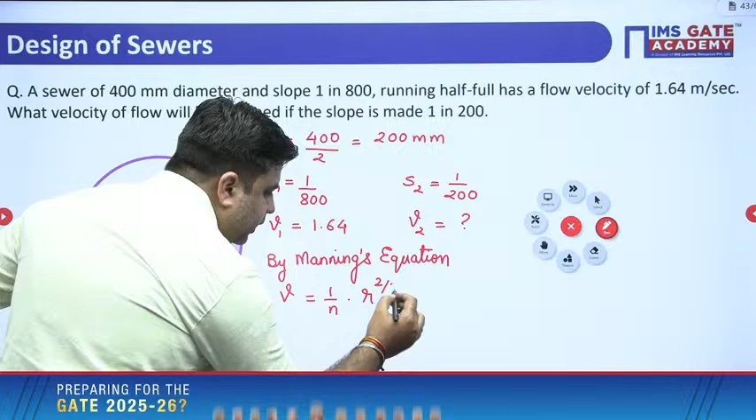By Manning's equation, we know that velocity of flow is equal to 1 upon n into r raised to power 2 by 3 into s raised to power 1 by 2. So you can simply take the ratio of V1 by V2 and write down the value of S. Since the depth of flow is not changing, the value of R will not change. Since the material of the sewer is not changing, the value of N will not change.

So we can take the ratio of V1 by V2, which is equal to 1 upon N into R raised to power 2 by 3 into S1 raised to power 1 by 2, whole divided by 1 upon N into R raised to power 2 by 3 into S2 raised to power 1 by 2. So you can check this out: 1 by N will cancel out, R and R will cancel out, and you can simply take the ratio of V1 by V2 to calculate the value of V2.

Please do this calculation. V1 is given to you as 1.64. What is V2? You need to find out. This is equal to S1 by S2 whole raised to power 1 by 2. S1 is 1 in 800 and S2 is 1 in 200. So when you do it, it will be 200 by 800 raised to the power 1 by 2. Please solve this. So V2 will be equal to...

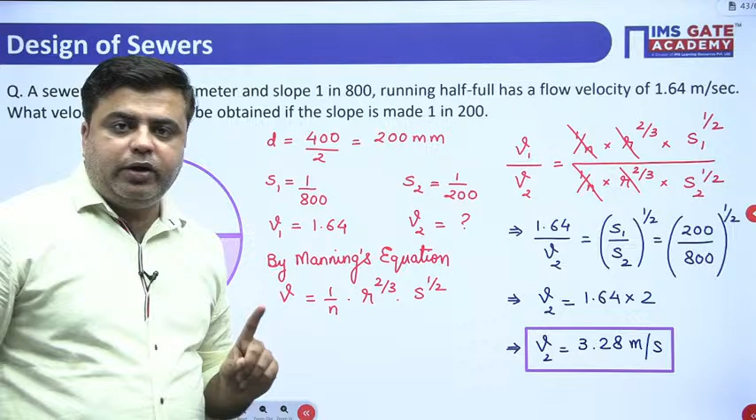Using the Manning's equation, always remember that if the depth of flow is not changing, hydraulic mean depth will also not change. Hydraulic mean depth is the ratio of wetted area to wetted perimeter. So if depth of flow is not changing, this wetted area is not changing and this wetted perimeter is also not changing. Okay, let's move ahead with this.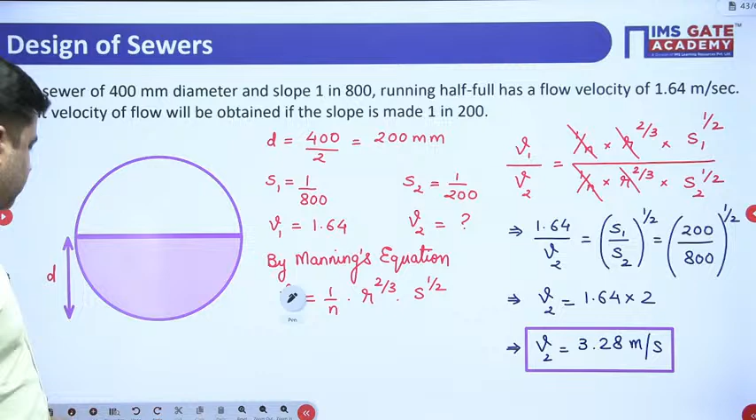Now sir, you need to find out the wetted perimeter. So for wetted perimeter, we have another ratio, small p by capital P. What is it equal to? We have seen this relation here. Small p by capital P is equal to alpha by 360. What is the value of alpha? Alpha is 120 degrees, so this will be 120 by 360. So small p is equal to capital P into 1 by 3, and capital P is nothing but pi d. Small p is equal to pi d by 3.

Capital P is the perimeter, wetted perimeter, when the sewer is running at full depth. So when the sewer is running at full depth, you have to consider the entire perimeter of the sewer. So P is equal to pi d by 3. Again, it is a very basic question from this sewer, but an important one, because it is using two formulas - this is the second one and this is the first one. Two important formulas it is using. That is why it becomes an important question here.

Chal, let's move ahead with this. Try this next question. The question says that a sewer having a diameter of 400 mm and slope of 1 in 600, while running full, has a mean velocity of 0.9 meter per second. If both the diameter and slope are doubled to respectively 800 mm and 1 in 300, what will be the change in mean velocity when running half full?

So first observe this case number 1. When the diameter of the sewer is 400 mm, slope is 1 in 600, while running full - this time it is running full. Okay, so first scenario, case 1, when the sewer is running full.

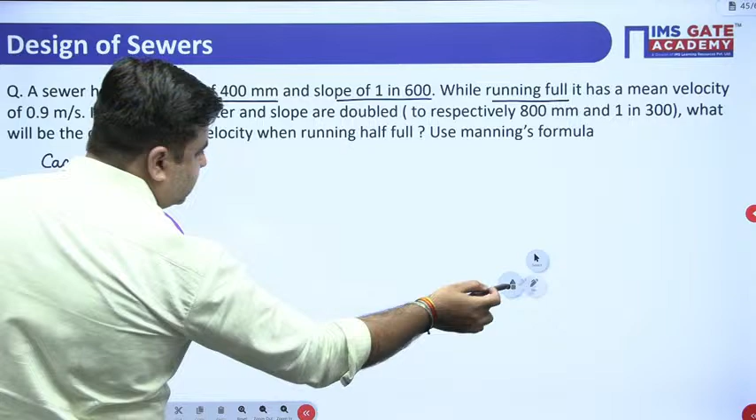This is when the sewer is running full. When your sewer is running full, the diameter of the sewer is given to you as 400 mm. So first of all, calculate the hydraulic mean depth for this sewer. Hydraulic mean depth for this sewer, R1, is equal to wetted area upon wetted perimeter.

R1 is equal to wetted area, which is pi by 4 into D square, so D is 400 square, and wetted perimeter is pi D, so pi into 400. Pi and pi will cancel out. Calculate the value of R1: D is 400, so this will be 400 by 4. So R1 will be 100.

So the first thing you have calculated is the hydraulic mean depth of the first case. Now you can use Manning's expression and write down the expression for V1. By Manning's equation, V1 is equal to 1 upon N into R1 raised to the power 2 by 3, into S1 raised to the power 1 by 2. Just write down the expression and leave it.

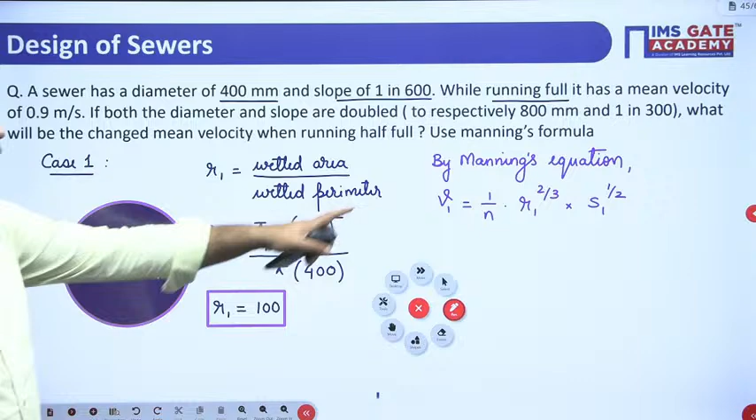So V1 is given to you as how much? 0.9 meter per second. So V1 is 0.9, which is equal to 1 upon N into R, which you calculated as 100, raised to the power 2 by 3. And S1 is how much? S1 is 1 in 600, so 1 by 600 raised to the power 1 by 2. So this is the expression for V1.

Now in the second case, both diameter and slope are doubled. So the new diameter will be 800 and slope will be 1 in 300. So case 2 is both slope and diameter doubled. In this case, the sewer is running half full. This will be the depth of flow.

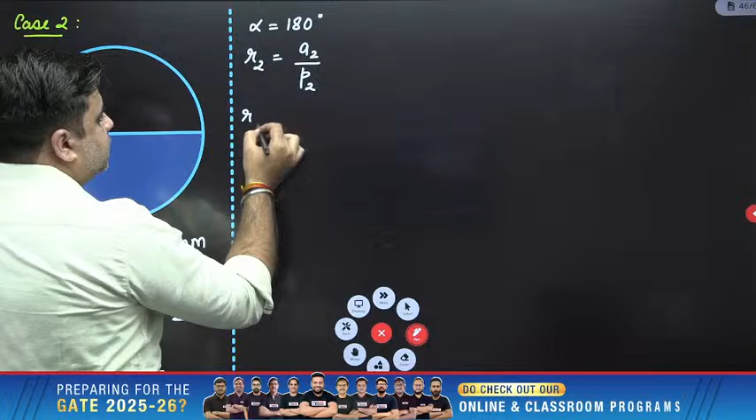Now you can calculate the value of R, using this expression: alpha upon 360 minus sine alpha upon 2 pi, by alpha upon 360. Or instead, I can write R2 is equal to A2 by P2. Now what is A2? A2 is total area, half of that total area, so this is pi into 800 square by 4. And similarly, P2 is half of total perimeter, that is pi into 800. So that can be the value of R2. Instead of calculating alpha, you can directly use this.

So I can remove this. Let it be. So what will be the value of R2? Just calculate this R2. The half and half will cancel out, the pi and pi will also cancel out, and 800 will cancel out with 800. So now you have 800 by 4, so that is 200. The value of R2 will be 200.

So you can use this expression: V2 is equal to 1 upon n into R2 raised to the power 2 by 3, into S2 raised to the power 1 by 2. Apply all the things. V2 you need to find out is equal to 1 upon n into 200 raised to the power 2 by 3, into slope 1 in 300 raised to the power 1 by 2.

Now simply take the ratio of V2 by V1 to get the value of V2. So V2 by V1 is equal to 1 upon n into 200 raised to the power 2 by 3 into 1 by 300 raised to the power 1 by 2, whole divided by V1, which is 1 by n into 100 raised to the power 2 by 3 into 1 by 600 raised to the power 1 by 2.

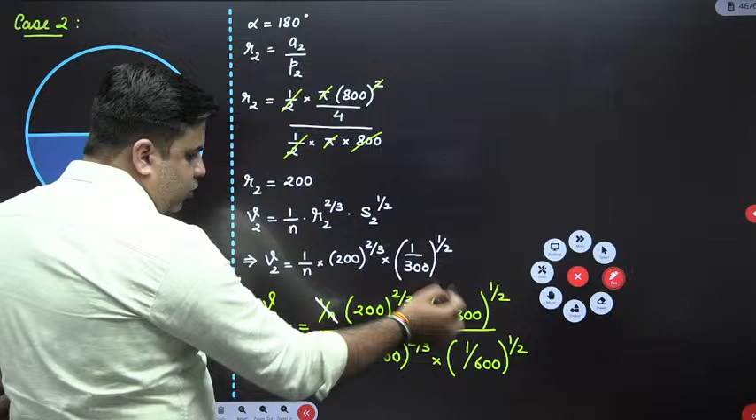So here this will be 2 raised to the power 2 by 3 and this will be 2 raised to the power 1 by 2. So I have this expression, V2 by 0.9 is 2 raised to the power 2 by 3 into 2 raised to the power 1 by 2. You can add them, so V2 is equal to 0.9 into 2 raised to the power 2 by 3 plus 1 by 2. How much will that be? This will be 4, 4 plus 3 is 7, so this will be 7 by 6. Please calculate this.

Sir, I missed my correction date for the application of 20th November, but today I submitted it. Will it be accepted? Application is accepted, your corrections are accepted. Since you were able to submit it, it means the dates have been extended. If the window had been closed, you would not have been able to submit.

So V2 is equal to 0.9 into 2 raised to the power 7 by 6. Please do this. V1 is 0.9, so 2 raised to the power 7 by 6, into 0.9. So this will be 2.02 meter per second. So V2 will be 2.02 meter per second. This is how you need to deal with this question.

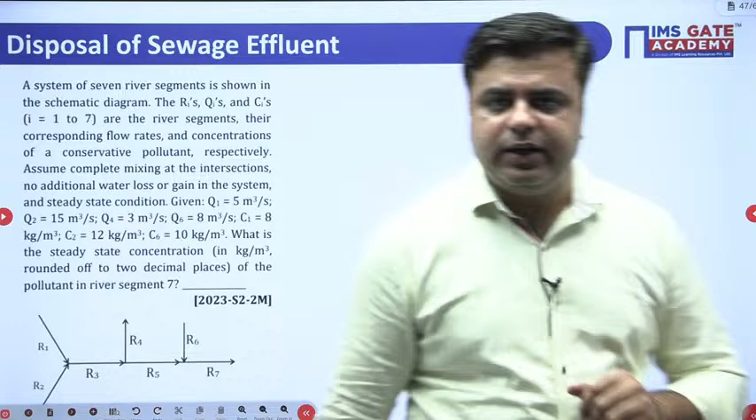The question says a system of 7 river segments is shown in the schematic diagram. So this is a system of river segments which is shown. Their corresponding flow rates and concentration of a conservative pollutant respectively are also mentioned. Assume complete mixing at the intersection, no additional water losses or gains in the system, and steady state condition. Given Q1, Q2, Q4, Q6 and C1, C2, C6 concentrations are given to you. You have to find out what is the pollutant concentration in this river segment 7. Now you can see this.

There are 2 segments of river, R1 and R2, which are meeting and forming river segment R3. This is river segment R1 and this is river segment R2, they are meeting together to form river segment R3. So now if I give you the discharge of river segment 1 and discharge of river segment 2, and simultaneously the concentration of river segment 1 and 2, can you calculate the value of discharge of this river segment 3? And can you also find out the concentration of the pollutant in this river segment 3?

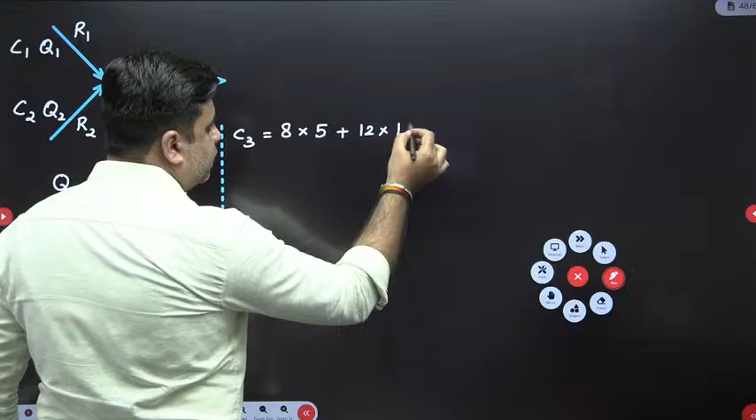So C3 is the concentration of pollutant in river segment 3 and Q3 is the discharge in this river segment 3. Please do the calculation for C3. So C3 is equal to, C1 is how much? C1 is given to you as 8 kg per meter cube and C2 is 12. C1 is 8, Q1 is 5, C2 is 12, Q2 is 15, divided by 5 plus 15. Let me just cross check this again. Yeah, C1 is 8 and C2 is 12. Okay sir, calculate this C3.

So the value of C3 will be 8 into 5 plus 12 into 15 divided by 20. So this will be 11 kg. What is the unit of concentration? 11 kg per meter cube. This is 11 kg per meter cube.

This is the value of C3. Now check this out. In the further river segment, they have said that from this R3, R4 and R5 are getting separated. So basically R4 is moving out and then R5 is continuing like this. This is R5, and this is your R4.

Here the major mistake that student made in attempting this question is, you have to understand, my dear, the concentration will not going to change if the river is separated. The concentration will only going to change if the rivers are getting mixed together. Then only the dilution will going to change the concentration. But if the rivers are getting separated, the concentration will not going to change.

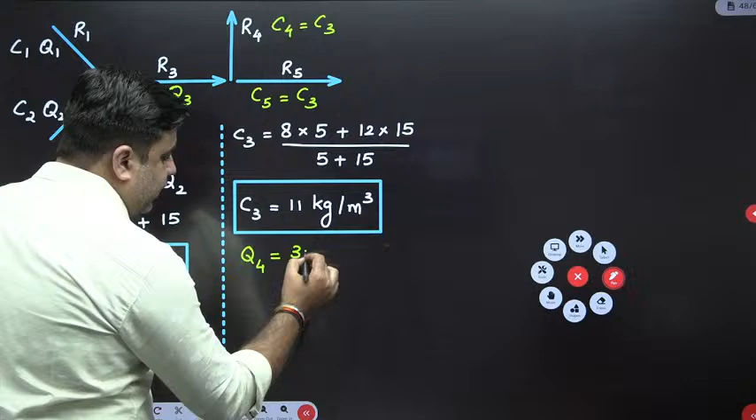So now for that, you are given with the discharge of river 4. So discharge of river 4 is 3 meter cube per second. So Q4 is 3 meter cube per second. So I can write down Q3 is equal to Q4 plus Q5.

You know the value of Q3, which is 20. Q4 is given to you as 3, and Q5 you can calculate from here. So Q5 will come out as 17 meter cube per second. This is the value of Q5.

Okay, now once you got the value of Q5, you got the concentration of C5. So what will be the concentration of C5? C5 is equal to C3. And what is C3? C3 is 11 kg per meter cube.

Now in this C5, one more river segment is getting added, that is C6, and it is forming river segment 7. This river segment 6 is getting added into river segment 5 and forming river segment 7. This is your river segment 6 and this is your river segment 7.

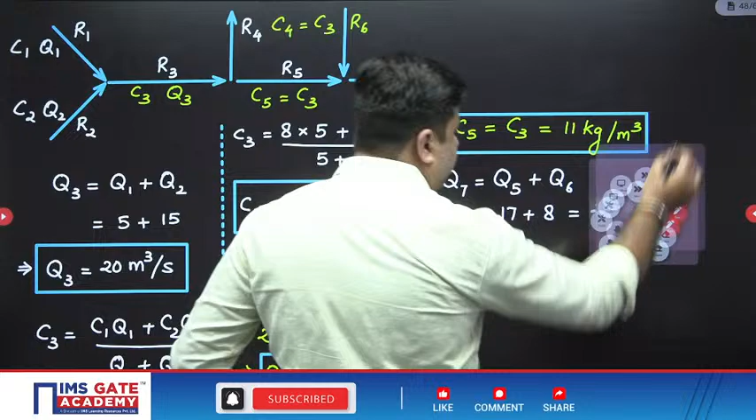Then next you have C7 that you need to find out. So C7 is nothing but C5 into Q5 plus C6 into Q6 divided by Q5 plus Q6.

Chalo, do this. So this is equal to, C5 is how much? C5 is 11. What is Q5? Q5 is 17. What is C6? C6 is given to you as 10 kg per meter cube. This is 10. And what is Q6? Q6 is 8, divided by 17 plus 8.

You can do this calculation and get the value of C7. Please do this. So this is 11 into 17 plus 10 into 8, divided by 17 plus 8. So that will be 10.68. C7 will be 10.68 kg per meter cube. So this will be 10.68 kg per meter cube.

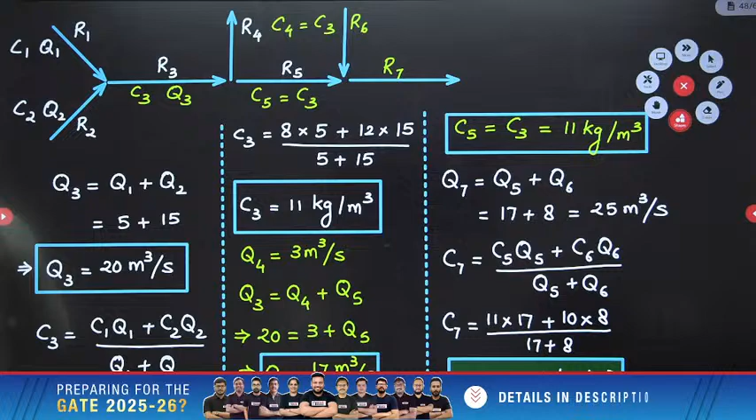After this, my dear, comes the treatment of wastewater. So the treatment of wastewater comprises of these following things. It starts from the pre-treatment, where first we do screening, then we go with the comminutors and macerators, which basically grind the coarse suspended solids into the lighter ones.

And then in India, we don't go with the unit which is termed as skimming tanks. So basically in European countries, skimming tanks is used. A skimming tank is a unit to remove oil and grease from the wastewater. In India, instead of using skimming tanks, we go with vacuators for removing this oil and grease.

Reason why skimming tank is not used in India? Reason is very simple. In skimming tank, basically we provide the compressed air from the bottom, and when this compressed air moves from the bottom to the top, it agglomerates the oil and grease particles together.

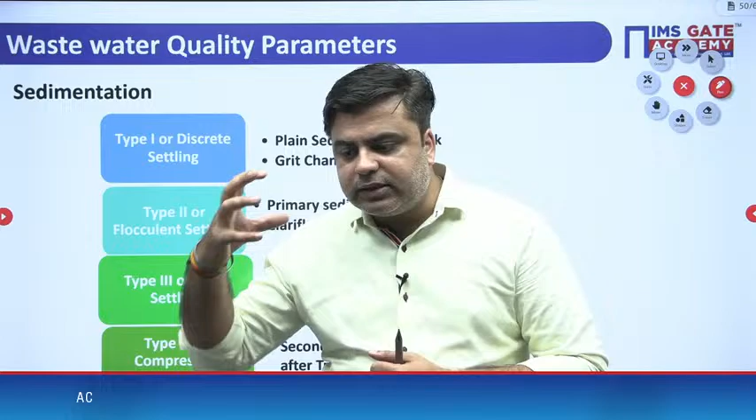The second type of settling is called flocculent settling, where during settling, the shape and size of the suspended solid changes. This usually happens in the flocculation tank, where sticky precipitates adsorb all the fine suspended solids over their surface and grow in size to form larger flocks.

And when it settles, that type of settling is called flocculent settling. Whatever expression of settling velocity we have derived is only applicable for discrete particle settling. It is not applicable for any of the other settlings.

Then you have zone settling. When the particle is settling and the concentration is so large that the velocity field around the settling particle overlaps with each other, meaning the turbulence caused around the particle is called the velocity field. If the concentration is so large that the velocity fields of two settling solids overlap each other, then they settle in the form of a zone. That is why it is named type 3 or zone settling.

The fourth type of settling is compression settling. If the concentration of particles is so large that the lower layer starts supporting the upper layer, and the upper layer compresses the lower layer such that water squeezes out from the voids, then that type of settling is called compression settling.

Type 3 or zone settling is observed in the secondary sedimentation tank after the activated sludge process, and type 4 settling is observed in the secondary sedimentation tank after the trickling filter. So these are the different types of settling.